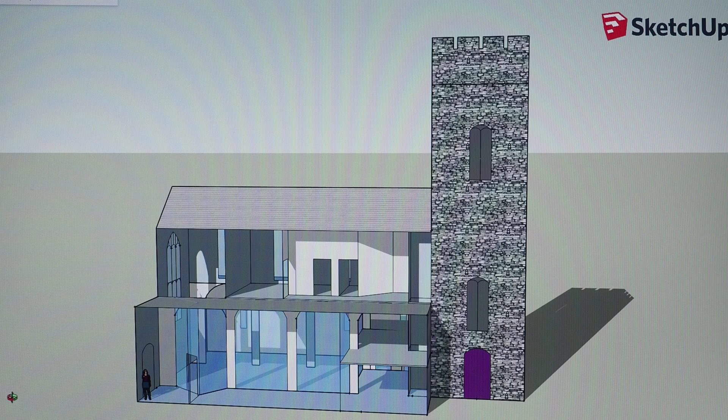Once inside, you will see a door on your left which will take you into the large open space. The other door in front of you opens onto a walkway leading to the back of the building. This walkway can be used as exhibition space or as a gallery.

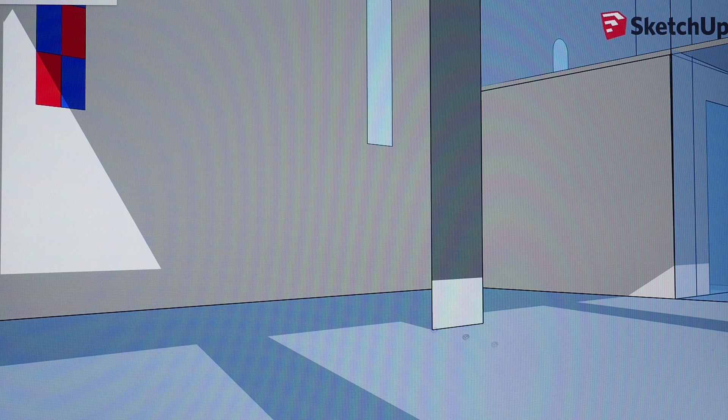The open space is ideally suited for performances, rehearsals and exhibitions. We've tried to keep this space as flexible as possible so there are no fixed seats. The ceiling is vaulted so the impact of the large window is not lost.

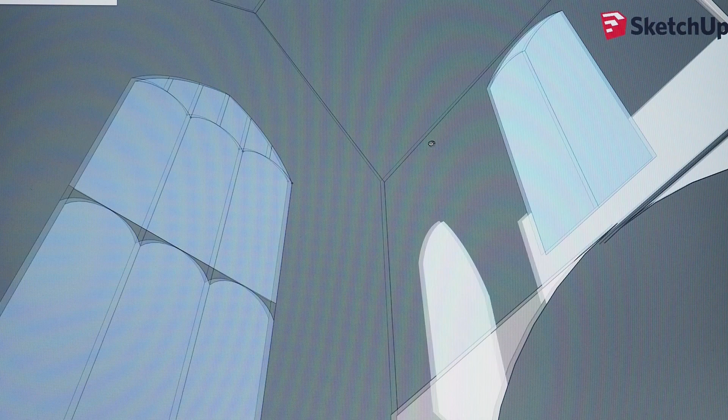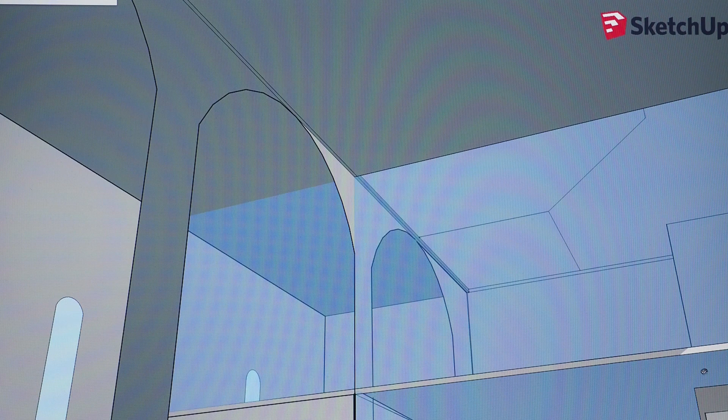The blue areas on the first and second floors are walls. They could be solid, soundproof glass, or a mixture of the two.

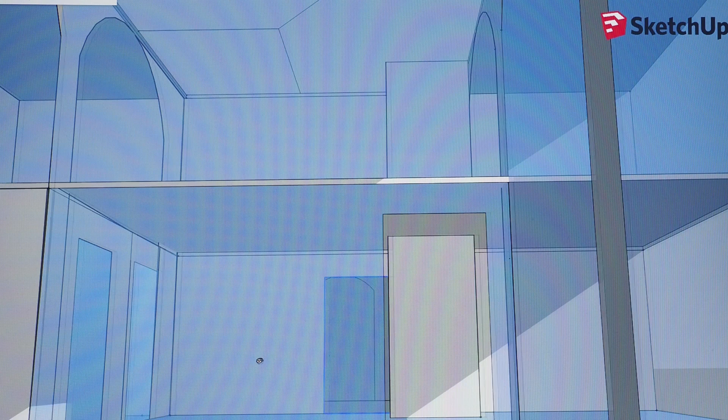On the ground floor, the walkway opens up at the back of the building into a possible location for a shop. The shop study we've carried out is available on this website, and the questionnaire asks about how you might use a shop. We would also hope to put the stone crosses somewhere in this area so that as many people as possible are able to see them.

The 2 doors on the left are for a disabled toilet and a storage room. There is also a small kitchen in this area too.

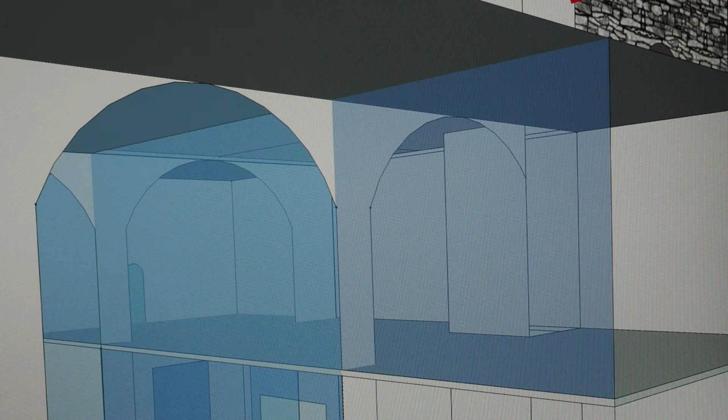The space on the first floor spans the whole width of the building and juts out into the open space beyond the shop below. We thought this area could be used as a heritage or genealogy centre where locals and visitors can learn what it was like to live here in the past. By setting up a local history group, we would hope to capture lots of information about local families linking the past to the present day.

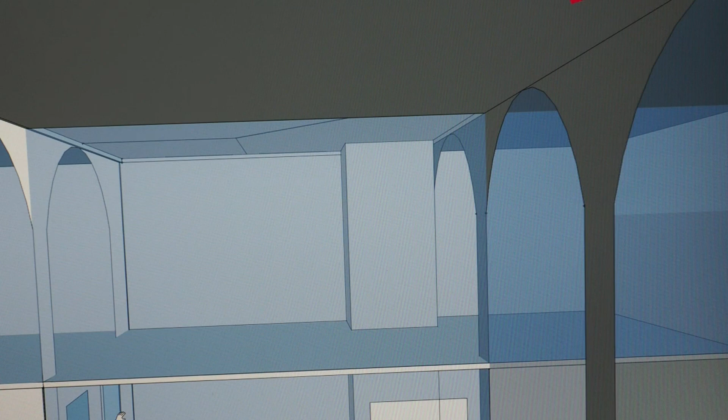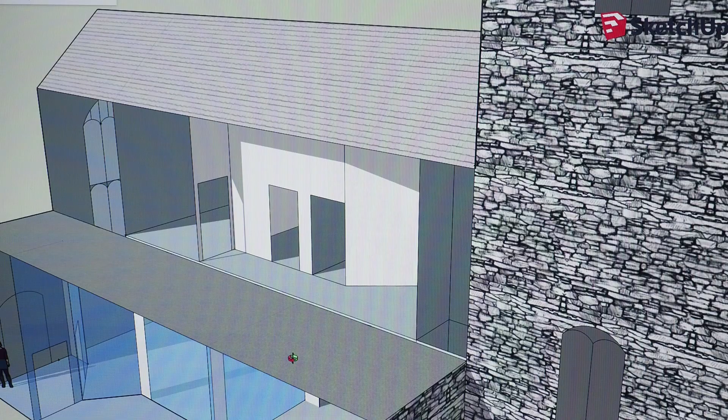The space on the second floor juts out into the open space beyond the first floor. The layout is yet to be decided, and it will likely have a number of rooms that could be rented out as offices, places for private meetings, therapy rooms or creative spaces.

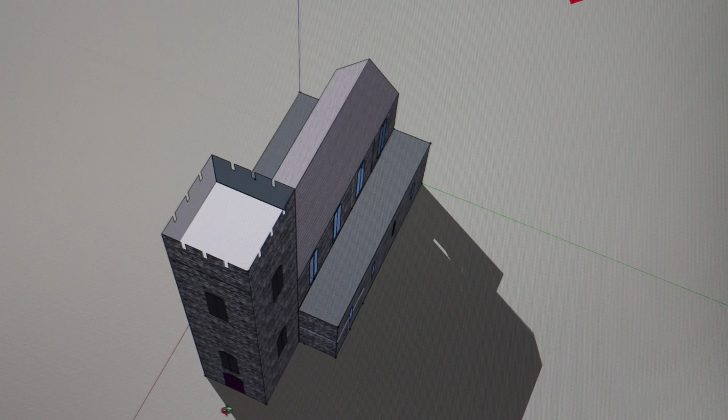The intention is to have a viewing platform at the top of the tower. This should provide a stunning view of the glen seldom seen before. Folks would be encouraged to make a donation to go up the tower.

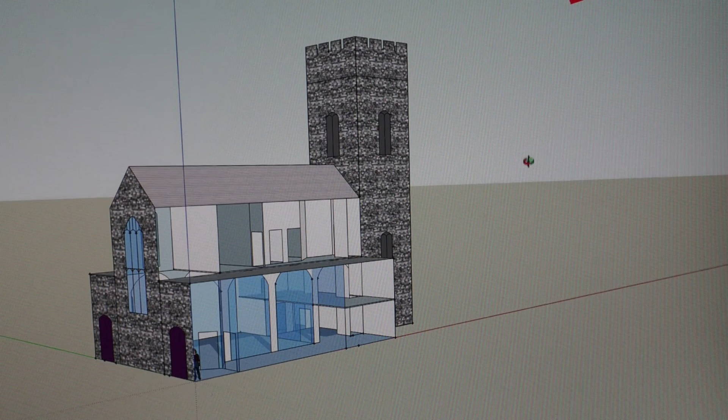The different areas within the building can be secured and used whether other areas are in use or not. The idea of a staggered ceiling in the open space offers us usable floor space on the first and second floors with the potential to generate additional income. It will also reduce the heating costs for what otherwise would be a very lofty space.

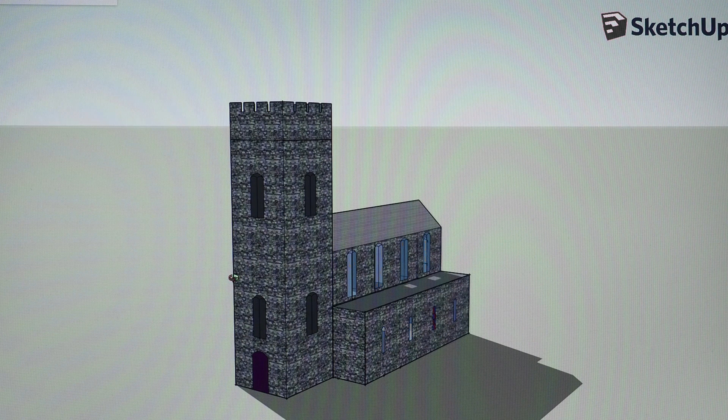We hope you've enjoyed our tour. We would have liked to have been able to meet with you to talk the plans through, but are unable to do so. If the decision is to proceed with the project, we will have to make an application for funding to enable us to buy the church building in August for a decision in November. The funding is not available beyond then.